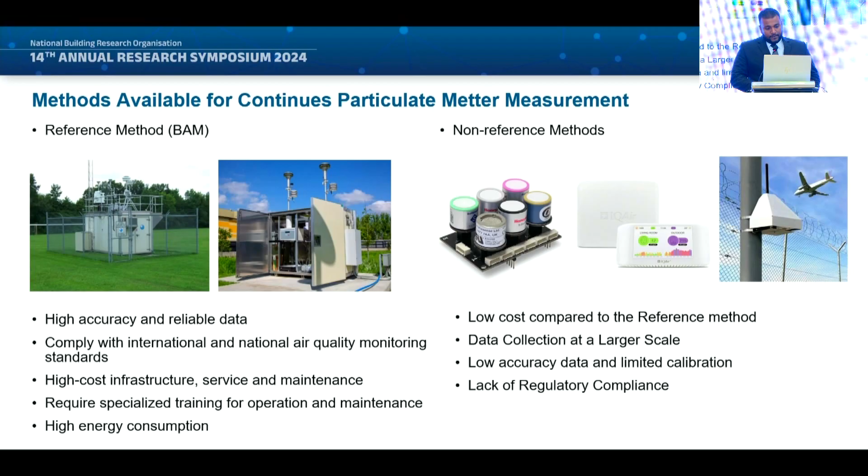Therefore, we have developed a low-cost sensor unit especially for particulate matter analysis, since it has several advantages compared to the other low-cost sensors in the market. They are low-cost, easy to calibrate to our environment conditions, easy to repair and troubleshoot, have no dependency on third-party service and maintenance, are easy to integrate with other custom-built systems or third-party platforms, etc.

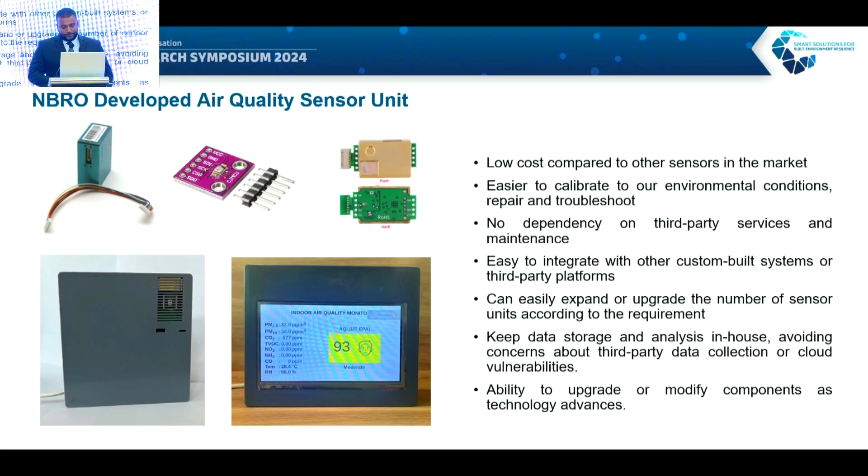Beta attenuation monitor, known as BAM, is one of the widely used reference-grade real-time techniques for ambient air quality monitoring in the worldwide. The principle behind beta attenuation monitor is that energy is absorbed from beta particles as they pass through particulate matter collected on filter media.

Beta ray can either be absorbed, reflected, or they can pass through a material. The concentration of material present determines how much beta ray intensity is attenuated.

Light scattering technique is used to calculate the particulate matter concentration in low-cost sensors. Light beam is scattered depending on the size of particles that go through the light beam.

The main objectives of this paper are to validate the sensor unit by correlating with the reference grade beta attenuation monitor, evaluation of performance of low-cost sensor in different environment conditions to check the data accuracy and reliability, and introduction of validated low-cost sensors to the existing air quality monitoring network to enhance the monitoring capacity.

Methodology. Co-location experiment was done in Colombo area for the validation of sensor unit. We take more than 1 month data for development of correlation between sensor unit and BAM.

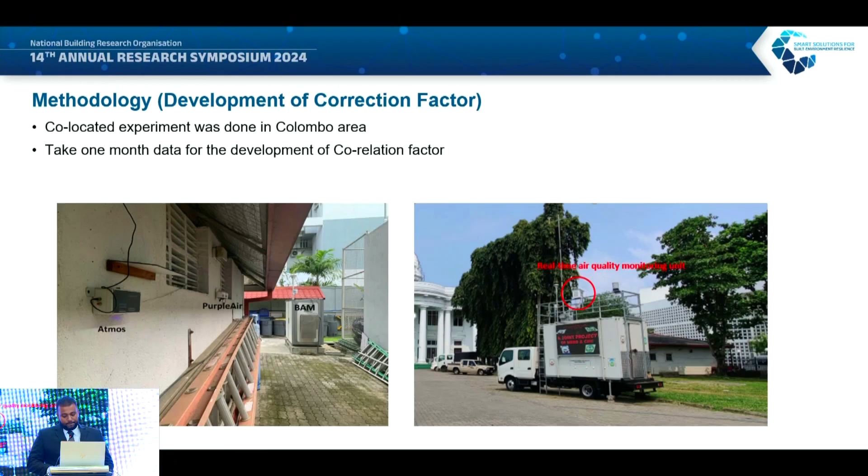In addition, a performance evaluation of multiple sensors was done in Battaramulla area, at the CEA reference grade laboratory at CEA Battaramulla area, and another study was done at Anuradhapura area for 1 week period. Also, performance evaluation in other areas are continuing with an island-wide monitoring program.

Validation was done according to the method given by US EPA, and the evaluation was done according to the NF ISO 13528 standard. Score Z and number EN values were used to confirm the performance of each sensor.

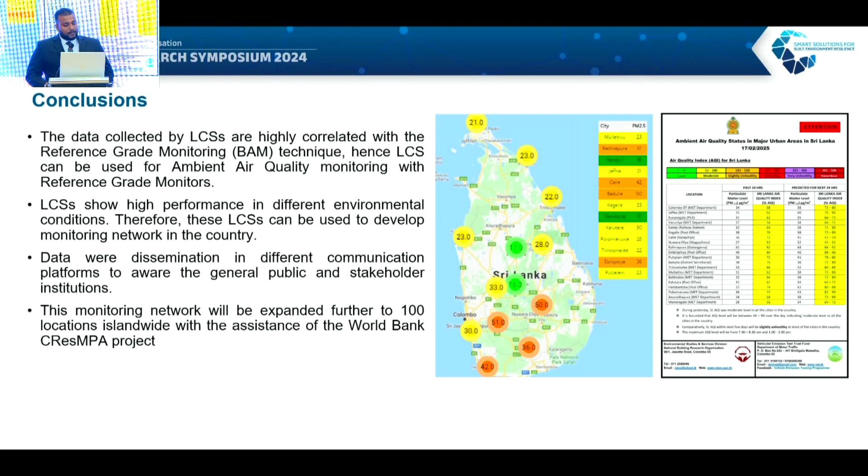And data were disseminated on different communication platforms to make aware the general public and stakeholder institutions. And this monitoring network will be expanded further up to 100 units island-wide with the assistance of World Bank funds. And these are some references used for this study. Thank you for listening.

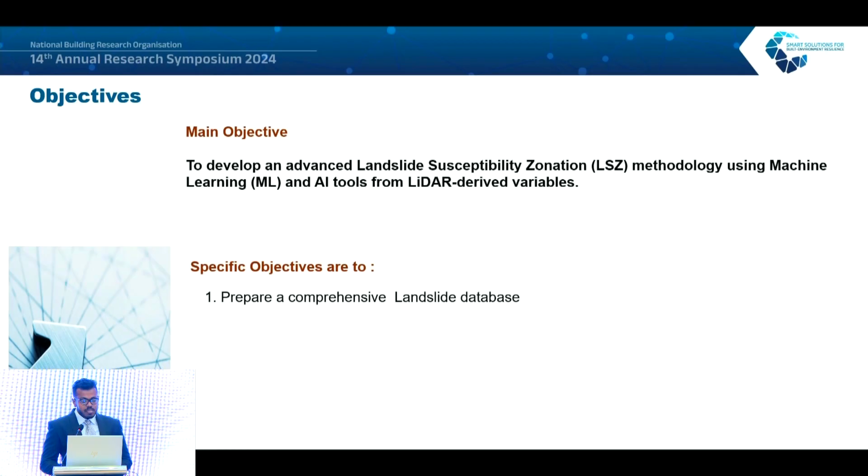So, our current methodology implemented by NBRO is laborious, expensive, and cannot be frequently updated. So, in this study, we present to target these above issues. So my main objective is to develop an advanced landslide susceptibility zonation methodology using machine learning and AI tools from LiDAR-derived variables. These are my specific objectives.

For the study area, we selected Kegalle district, which has more than 1 million people with population in hilly areas. Considering landslide history, this district is frequently affected by landslides, especially during the southwestern monsoon.

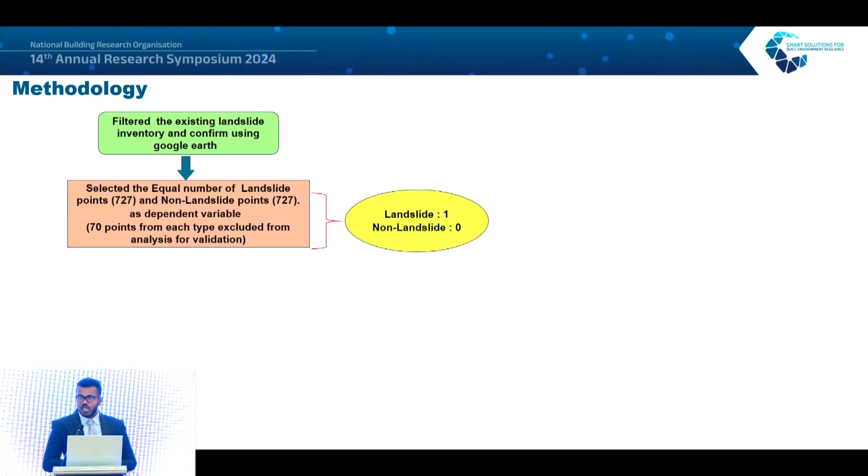For my methodology, we first filtered the existing landslide inventory and confirmed them using Google Earth. Then we selected an equal number of landslide points and non-landslide points as dependent variables, considering the landslide initiation area. Then 70 points from each type were excluded from analysis for validation.

Then we extracted 12 independent variables using LiDAR 2-meter DEM. Based on significance and literature, we selected 9 variables. After that, we applied 6 machine learning models and selected the best fit model. Then we generated a susceptibility score from the best fit model and finally reclassified it into susceptibility zones.

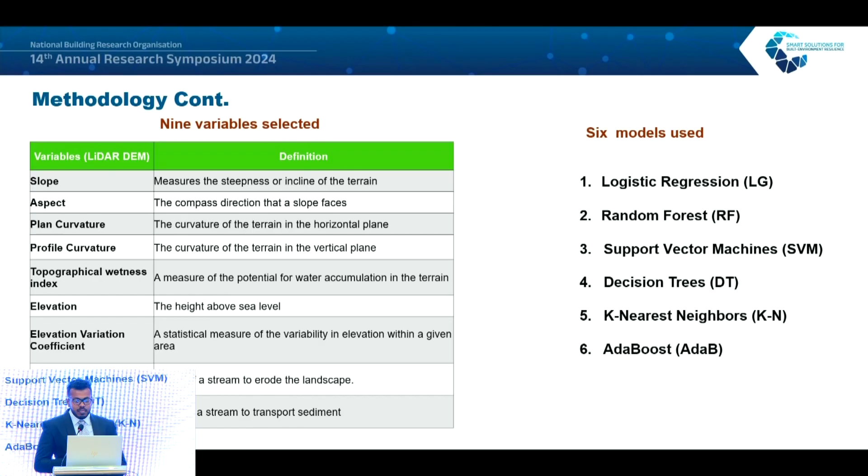These are the 9 variables I selected for this analysis, and these are the 6 models used here. For model discrimination, we use the area under the receiver operating characteristic curve and the precision-recall curve.

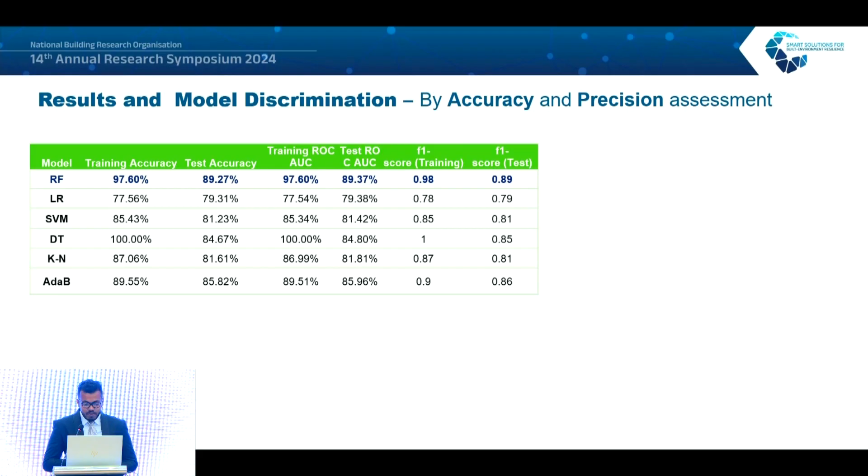So accuracy and precision assessment also confirm random forest is the best model. According to literature, random forest consistently outperforms other machine learning models in landslide susceptibility studies because it handles non-linear relationships, is robust to overfitting, has high accuracy in fast analysis, implicit feature importance, and handles high dimensionality. It also uses relatively few hyperparameters and is easy to tune.

Then for model validation, cross-validation was used. This is a technique to assess how well the model will generalize to new, unseen data. We used 5-fold cross-validation here, and the process is repeated 5 times, with each fold serving as the test set once, to get a more robust estimate of performance than a single train and test split.

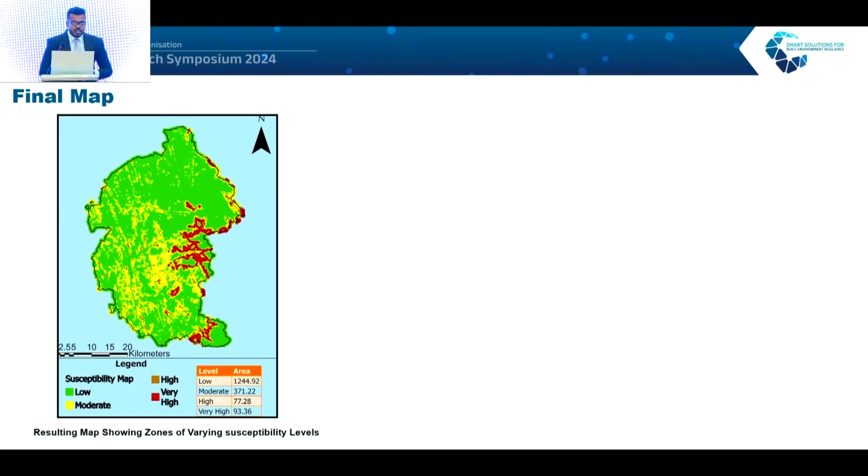Using this validated model, we generated the map for the entire Kegalle district.

For that, we reclassified into 4 susceptibility zones, and this reclassification was done considering the cumulative area of the high susceptibility zone to be less than 10%. This table shows the cumulative area of these 4 zones.

For validation, 74% of landslide points were located within high and very high susceptibility zones, and 71% of non-landslide points were located within low susceptibility zones.

In conclusion, LiDAR-derived variables and machine learning can be effectively used in this type of study. In this study, the random forest model showed the most promising result among the 6 models tested, achieving the highest accuracy and excellent discrimination. Model validation also confirms this.

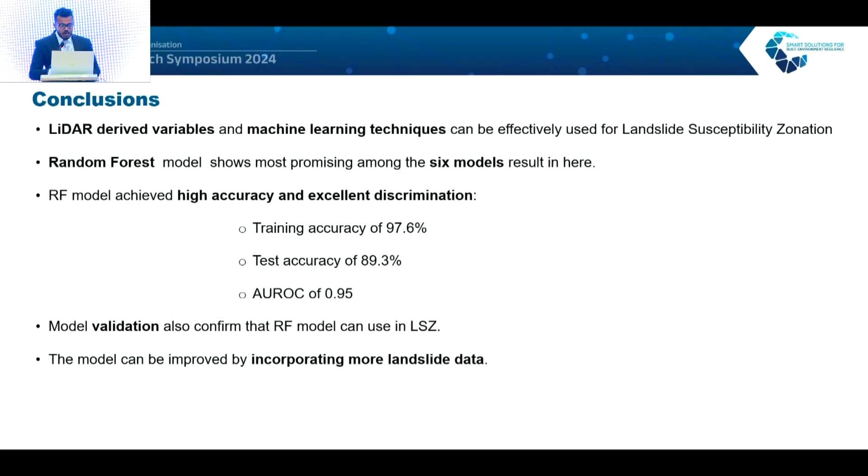But improving with more landslide data and considering other relevant data such as geology, hydrology, land use, and landform can improve this model further. Also, it is advisable to consider specific terrain and environmental conditions when extending to different regions.

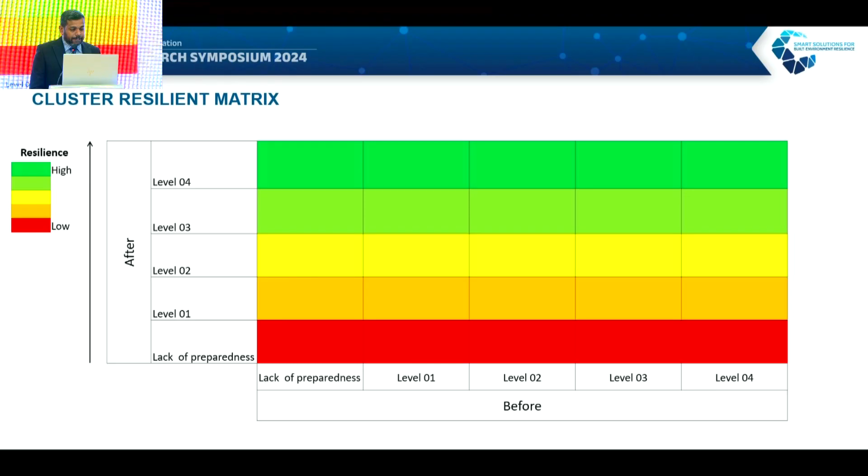So with this matrix, we have collected the information from 119 clusters to assess their resilience level based on 17 identified resilience indicators. A comprehensive and temporal analysis method was used, and we analyzed the cluster resilience level before and after implementing the community-based programs.

Our finding is that some of the clusters exhibit a high baseline resilience level requiring only monitoring programs, and most of the clusters initially lacked baseline resilience. However, their resilience levels improved following the implementation of our community-based approach programs. When we take this into the matrix,

68 clusters achieved level 1 resilience from the bottom, and 39 achieved level 2 from the red line. Another 11 clusters were in level 1 before, and out of them 2 remained in the same level, 5 achieved level 2 and 4 achieved level 3. And 3 clusters were in level 3 and remained in level 3 after the implementation of the community-based program. However, they need more attempts to achieve the high resilience level, the level 4 green line.

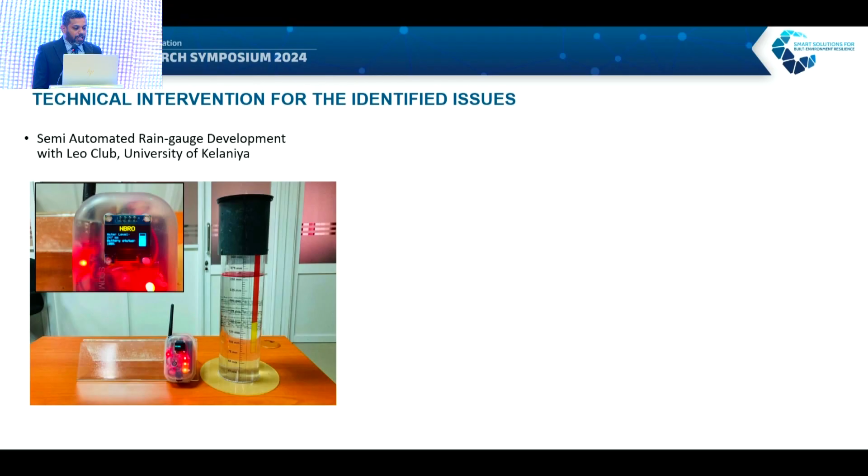The difficulty in measuring rainfall data using a manual rain gauge is one of the main issues identified. Therefore, we have technically intervened and introduced a semi-automated rain gauge in collaboration with the Leo Club of University of Kelaniya to tackle this issue. This semi-automated rain gauge consists of 3 parts: the manual rain gauge, the measuring sensor, and the remote display. The remote display can fit in the living area of the house.

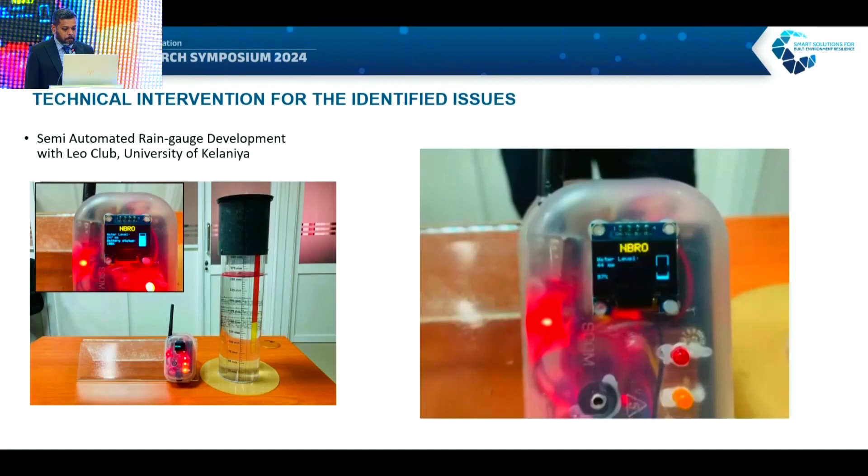During rainy times, the rainfall levels will display on the remote display. When it reaches the 75 millimeter level, the yellow LED will illuminate, at 100 millimeters the amber LED will illuminate, and the red LED will indicate the rainfall has reached 150 millimeters, which means evacuation level. After 250 millimeters, you will hear continuous beeping. This is still under development, and with more calibration and development, we intend to introduce this into the community for self-decision making and to improve their resilience.

So finally, with these findings, this assessment was a basic level assessment with hierarchical levels, and it should incorporate a comprehensive resilience assessment framework, such as a cluster resilience index, to systematically evaluate governance, technical, social and environmental factors, and also scale up the use of digital tools such as rain gauges connected to online dashboards, WhatsApp groups, and mobile apps for real-time data sharing and early warning dissemination.

And appreciation and recognition of the community contributions for their active participation, and also establish a robust monitoring system to track the progress of resilience building activities such as committee meetings, pre-monsoon preparedness, and mitigation measures.

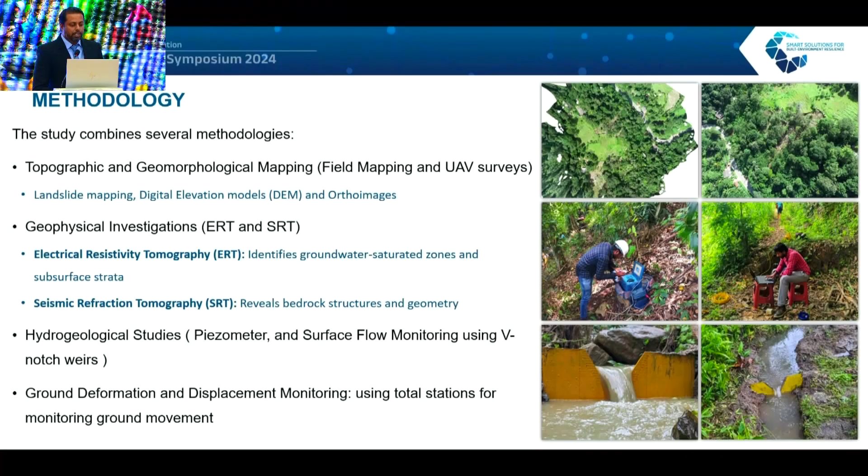This study combines several methodologies: topographical and geomorphological mapping, including field mapping and UAV surveys, landslide mapping, and creating the digital elevation model and ortho images. We have done geophysical investigation, like electrical resistivity tomography, which identified the groundwater saturated zones and subsurface strata, and seismic refraction tomography to identify the bedrock structures and geometry. Hydrogeological studies included installation of piezometers and surface flow monitoring using V-notch weirs. We also did ground deformation and displacement monitoring using a total station.

Generally, electrical resistivity tomography shows the ground electrical resistivity variation. In the low resistivity zone, we can find groundwater, seawater intrusion, groundwater saturated zones or highly conductive materials. In the high resistivity zone, bedrock or low conductive materials can be found. In between, soil or moderately conductive materials can be found. Seismic refraction tomography generally shows the seismic P-wave velocity variation. The low velocity zone shows loose or not compacted materials. In the high velocity zone, we find hard rock or hard materials. In between, medium to high density soil can be found.

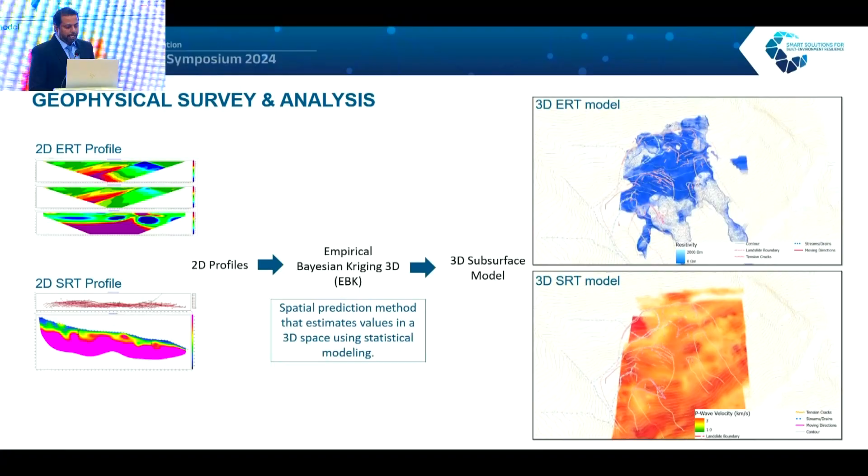First, the field data is used to create 2D profiles through analysis. After that, the 2D ERT profiles were made into the 3D model using the empirical Bayesian kriging 3D method. Empirical Bayesian kriging is a spatial prediction method that estimates values in 3D space using statistical modeling. These are the results from the 3D ERT and SRT models. Let's understand them separately.

From the 3D ERT model, as you can see in the map, the blue color shows the low resistivity zones where we found high groundwater concentration. The blue area is also within the landslide body area; the concentration is within the landslide body. This is a good finding that groundwater is a key factor in the landslide instability.

Let's move on to the seismic results. In the P-wave analysis, red color shows high P-wave velocities, indicating denser material such as bedrock, and the low P-wave velocity, green to yellow color, represents less dense materials such as soil.

So let's integrate the ERT and SRT results. As you can see in the image, first is the ERT, then SRT, and the combination of the integration. And you can see the blue color region is concentrated within the landslide mass and the movement direction, like a valley-like geometry.

And even during the dry period, there were many springs and water coming from the landslide, and also there were movements observed despite minimal or no rainfall in May 2024. These findings suggest that internal groundwater dynamics can also drive the activation of the landslide. All things emphasize that there is a need for effective groundwater management strategies for mitigation.

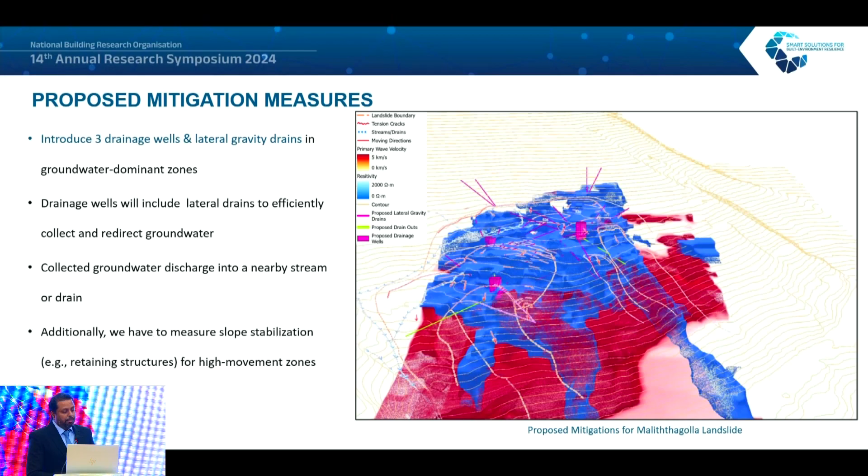So, we propose mitigation measures. Introducing three drainage wells is our proposal. As you can see in the image, drainage wells including lateral drains, in pink color in the 3D model. Using the lateral gravity drains, we collect water from the landslide area to the drainage well and redirect the groundwater discharge to the nearby stream or drain. Additionally, we have to take other slope stability measures like retaining structures for high movement zones.

So, as a conclusion of this study, integration of SRT and ERT data enhances the bedrock geometry, structural features, and groundwater behaviors. Groundwater dynamics play a critical role in the landslide and its activation. Effective mitigation requires subsurface drainage to control groundwater pressure and improve soil stability. The developed framework provides effective landslide mitigation in similar vulnerable areas. Additionally, these 3D geophysical approaches can be applied to various geotechnical, geological and hydrogeological applications.

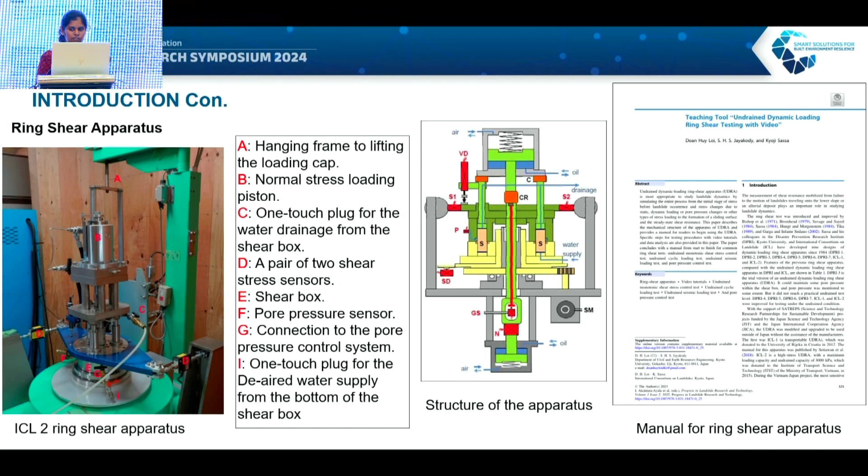Here you can see the ring shear apparatus. This apparatus is specialized laboratory equipment to determine the residual shear strength of soils. This simulates large shear deformation under controlled conditions. This picture shows the ICL2 ring shear apparatus in the NBRO Geotechnical Engineering Laboratory. Anyone can download the operation manual. It's freely available on Google.

Now let's see the aims and objectives of this research. The aim of this research is to evaluate the residual shear strength properties of soils in landslide prone areas in Sri Lanka using ring shear tests and to investigate the influence of soil composition on shear behavior. There are two objectives. First one is to determine the residual shear strength parameters of soils from selected landslide locations using undrained ring shear tests for LS Rapid simulation. Second one is to investigate the relationship between soil composition and shear behavior, including mobilized friction angles and steady state shear resistance.

Now let's see the research methodology. First, 4 landslide locations were selected along the Passara Bibile road area in Sri Lanka for the study. Then soil samples were collected from identified landslide locations. Then index property tests were conducted on the collected soil samples. After that, mobilized friction angle, steady state shear resistance and shear displacement characteristics were analyzed. Finally, effective stress paths and brittleness indices were determined and compared.

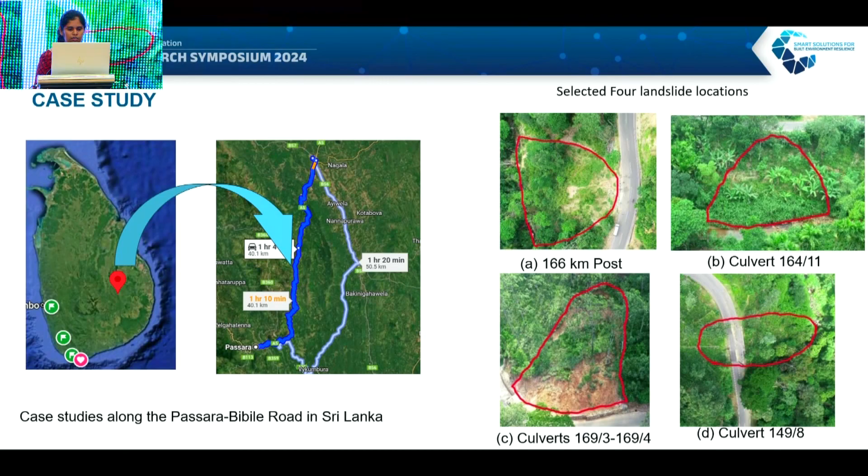Here you can see the focused area. This research was conducted focusing especially on case studies along the Passara Bibile road in Sri Lanka. This region experienced significant landslides during heavy rainfall events in December 2023, activating 4 notable landslides. These are the photographs of the selected 4 landslide locations.

Now let's see the laboratory testing part. The residual shear strength behavior of landslide soils was investigated through undrained ring shear tests conducted on the soil samples obtained from landslide locations. First I did the index property tests, sieve analysis and Atterberg limit test. Then I did the ring shear test. For that I used the ICL2 undrained ring shear apparatus with a maximum loading capacity of 3000 kilopascal.

For testing, dry soils passing through 2 millimeters were used. Saturation was achieved using deaired water in a vacuum tank. Then the BD value is checked to measure the degree of saturation. The most difficult part of this saturation procedure is that high fine content soils take more time to saturate.

Then soil samples were consolidated to simulate the initial stress condition of the sample. Then I did the monotonic shear stress control test under saturated condition. For that I used a shear stress increment rate of 0.25 kilopascal per second and an effective normal stress of 100 kilopascal.

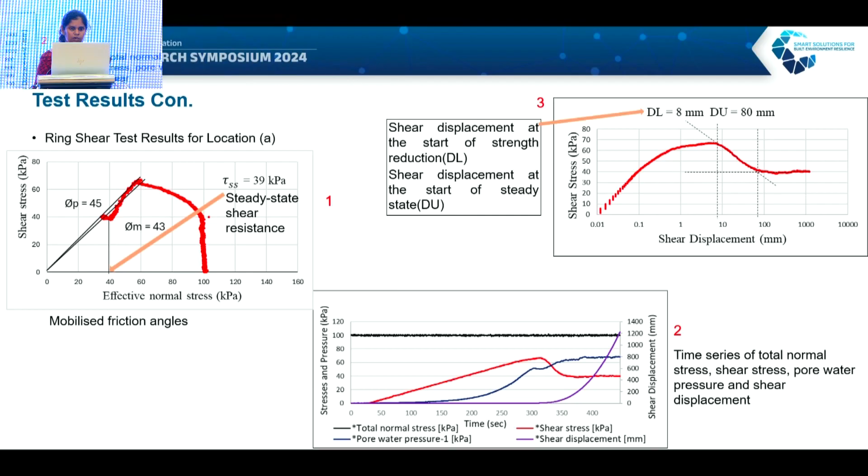The third graph is a shear stress versus shear displacement graph. From that graph we can obtain the shear displacement at the start of strength reduction and the shear displacement at the start of steady state.

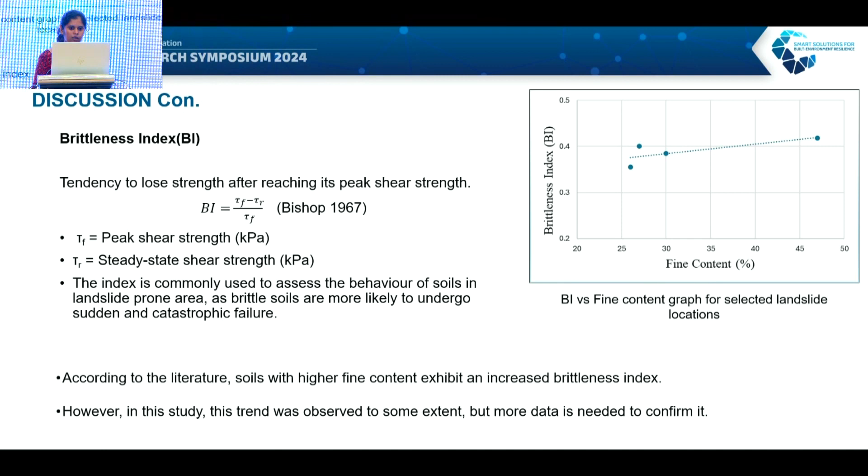According to the literature, soils with higher fine content exhibit an increased brittleness index. However, in this study, this trend was observed to some extent, but more data is needed to confirm it. Now let's see the conclusion part.

After doing ring shear tests for all landslide locations, the following conclusions were obtained. As fine content increases, the mobilized friction angle during motion decreases, and also shear strength decreases with higher fine content, while soils with lower fines exhibit higher peak strengths, and also an increase of brittleness index with fine content was observed to some extent.

The ultimate goal of this research is to compare residual shear strength parameters with a broad range of soil samples from diverse landslide locations to prepare a database for LS-RAPID simulation, and I also hope to perform LS-RAPID analysis for the 4 study locations using the obtained residual shear strength parameters to predict the runout path.

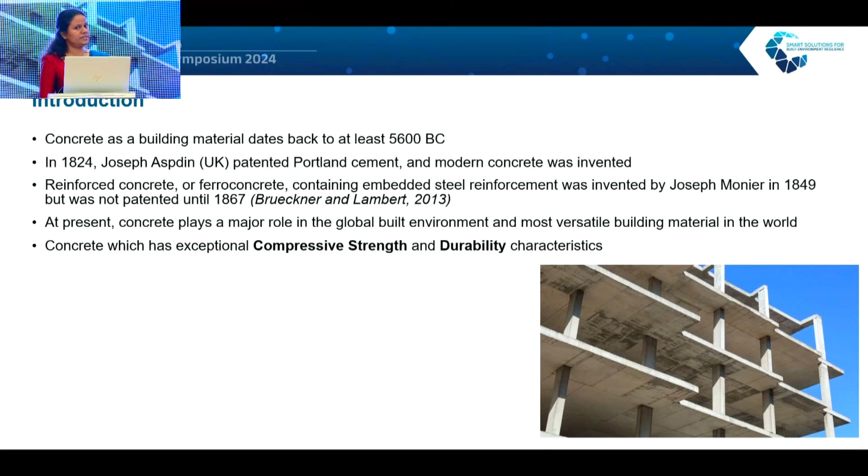Good afternoon, everyone. The topic of my research is enhancing the reliability of half-cell corrosion detection in aging concrete structures. Contents of my presentation. First, we move on to the introduction. The history of concrete as a building material dates back to at least 5600 BC. Modern reinforced concrete was invented in 1849.

At present, concrete plays a major role in the global built environment, and it is the most versatile building material in the world. The demand for concrete is rising rapidly due to its exceptional compressive strength and durability characteristics. Do all RC structures withstand their expected service life? No. Due to several reasons, concrete undergoes different degradations.

The most common concrete degradation mechanism is embedded rebar corrosion. Corrosion repairs in RC structures incur substantial financial burdens to the country, and diminish the service life of structures. Research background. Signs of corrosion, rust stain lines, cover cracking, or concrete spalling become visible when it reaches advanced stages. Therefore, early detection of corrosion is vital.

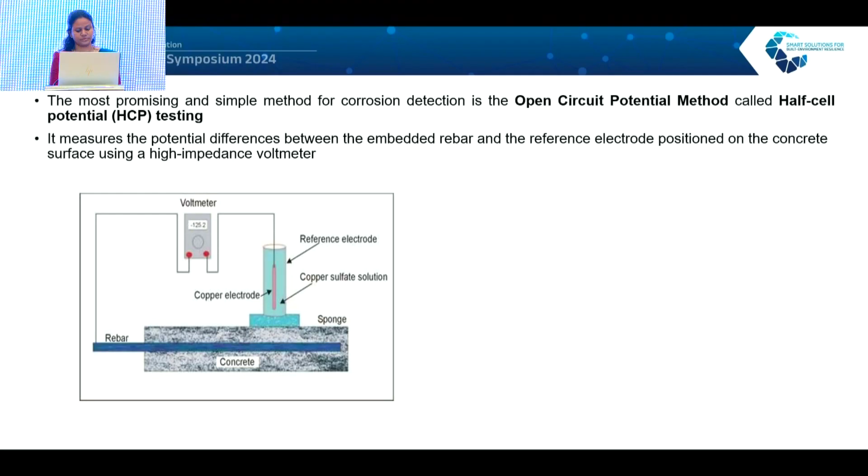Many advanced techniques are introduced to detect the onset of corrosion, namely sensor systems, but sensor installation for existing structures is really challenging. The most promising and simple method for corrosion detection is the open circuit potential method called half-cell potential testing. It measures the potential difference between the embedded rebar and the reference electrode positioned on the concrete using a high impedance voltmeter. Here I show you how we conduct this testing, ensuring electrical continuity with the embedded rebar in concrete. There are many influencing factors for half-cell potential testing.

There is interpretation guidance given in the ASTM standard, but when potential values are between minus 200 millivolts and minus 350 millivolts, it is interpreted as an uncertain corrosion condition, and monitoring an individual test parameter is inadequate for reliable corrosion diagnosis. Subsequent to corrosion initiation, most chemical and physical parameters of the concrete and the steel-concrete interface are changing. When we examine those parameters, we can enhance the reliability of corrosion detection techniques.

The objective was to enhance the reliability of the electrochemical corrosion detection technique, half-cell potential testing, by analyzing corrosion-related building investigation data from inland and coastal regions. This study consisted of field data of real RC structures, apart from laboratory control conditions.

When we move on to the methodology, first we conduct a visual survey and select 35 typical RC columns located in school buildings at different exposure settings. Then rebar arrangements and cover readings were taken using a cover meter, and moisture status was measured using an aquameter.

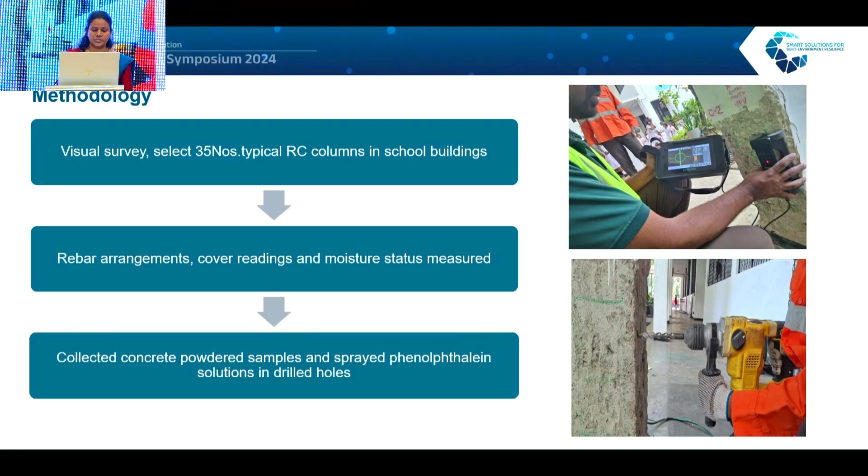Then concrete powder was collected by drilling to determine chloride concentration, and phenolphthalein was sprayed as a pH indicator to determine carbonation depth. Then we conducted half-cell potential testing and surface resistivity testing.

After that, corrosion-related parameter results with HCP readings were examined and exposed the related rebar points. Then we tabulated our test results and categorized them as per the ASTM C876 standard. Finally, we recommend required test parameters that need to be conducted simultaneous to the HCP testing.

The obtained half-cell readings were categorized into three main categories as per the ASTM C876 standard. When considering the level of chloride concentration near category 3, we subdivide it into another two. So firstly, we consider category 1.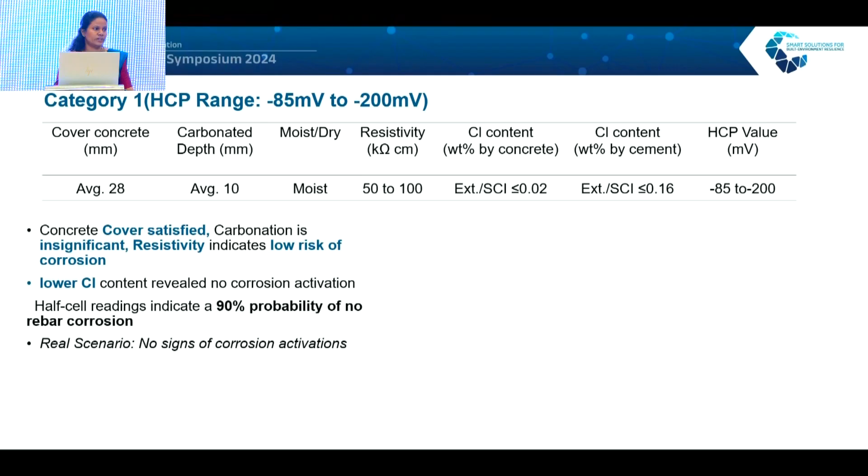Then we expose the rebar point. The real scenario showed no signs of corrosion initiation. So our corrosion-related test parameters, half-cell testing, and the actual conditions were compatible.

Then we move on to category 2. Here cover is insufficient and carbonation is not significant. Resistivity indicates high risk of corrosion, with high chloride concentration.

When we move on to category 3, in category 3A, average cover was 22 millimeters, which is not satisfied, and carbonation is more than the cover concrete, resistivity is negligible, and chloride concentration is lower. This heavy carbonation indicates susceptibility of rebar corrosion.

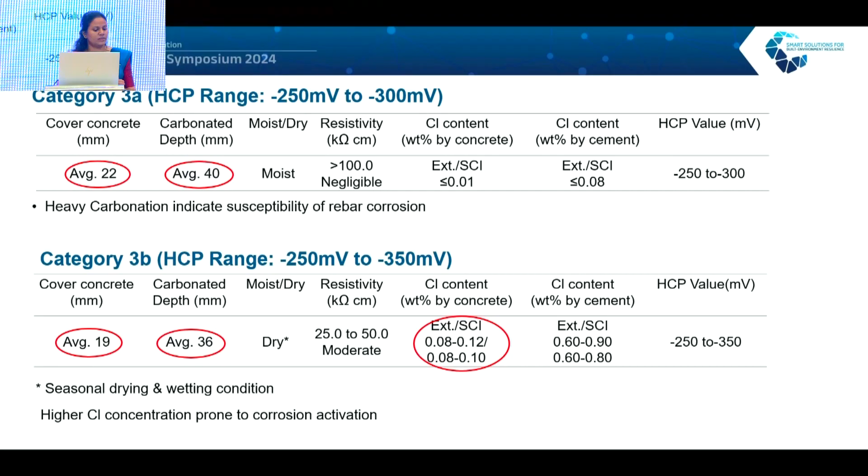Then we move on to category 3B, same scenario, cover insufficient, and also carbonation is beyond the embedded rebar, and chloride concentration is higher. That higher chloride concentration is prone to corrosion activation.

In both scenarios, we identified that carbonation is beyond the embedded rebar, which means alkalinity of the concrete reduced to pH 9 or below.

Electrical conduction through concrete needs a continuous pore network. Formation of calcium carbonate through carbonation causes a pore-clogging effect, inducing resistive media. This obstructs the electrical continuity through concrete and reduces the reliability of half-cell potential results.

HCP testing is not sufficient for accurate interpretation of corrosion kinetics in all scenarios, majorly for carbonated concrete. Related technical reports emphasize that the HCP method needs to be interpreted in the context of additional information. So in this case study, we used our building investigation data and

validated this concept, to diagnose corrosion activity in 3A and 3B types of carbonated concrete. It is essential to conduct chemical parameter testing, namely chloride levels, carbonation, and cover measurements, consequent to the HCP testing.

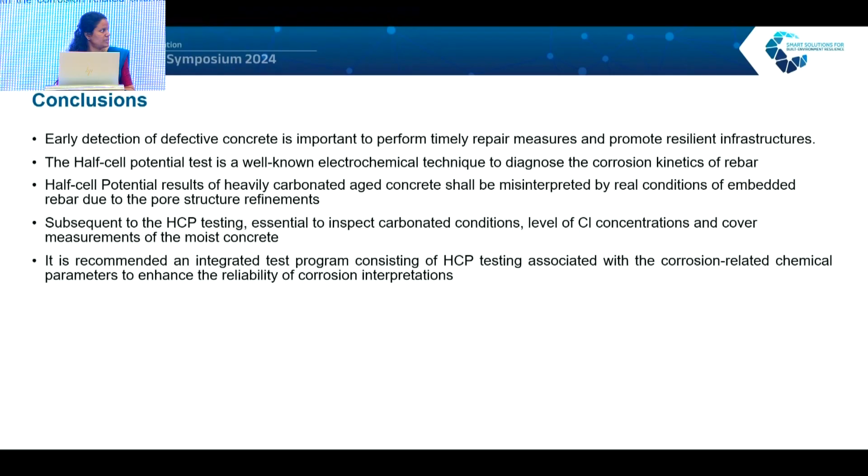It is recommended to have an integrated test program consisting of HCP testing associated with corrosion-related chemical parameters, to enhance the reliability of corrosion interpretations.

As a way forward, there is a need to conduct comprehensive study on physical, chemical, and mechanical parameters of concrete and rebar of aged corroded RC concrete, to develop the corrosion detection technique.

And also, now we are introducing various kinds of cement supplementary materials. It is needed to determine related critical chloride content, chloride ingress rate, and carbonation of different binder types other than conventional ones.

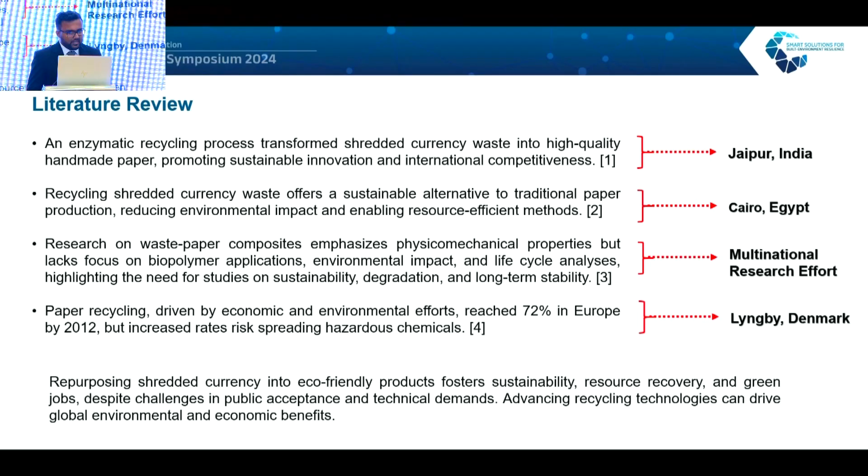Under the literature review, there are some countries that made value-added products using currency waste. India and Egypt made handmade papers using currency waste, and some multinational researchers made pulp using currency notes. Denmark researchers found some hazardous chemicals incorporated with these currency notes.

According to the literature, the main component of waste currency is cellulosic fiber. Other than that, polypropylene, lignin, hemicellulose, and some metal ions, some of them heavy metals, can be incorporated with these waste currency notes. Because of the cellulosic fiber, we can use them for making plywood boards, soft boards, handmade papers, and decorative items.

Our main objective is developing a value-added product using shredded currency waste in Sri Lanka. Under the task breakdown, we need to find the suitability of currency waste for building applications, determine the product properties and compare them with existing market products, study the properties to meet international standards, and convert the currency waste into an eco-friendly product.

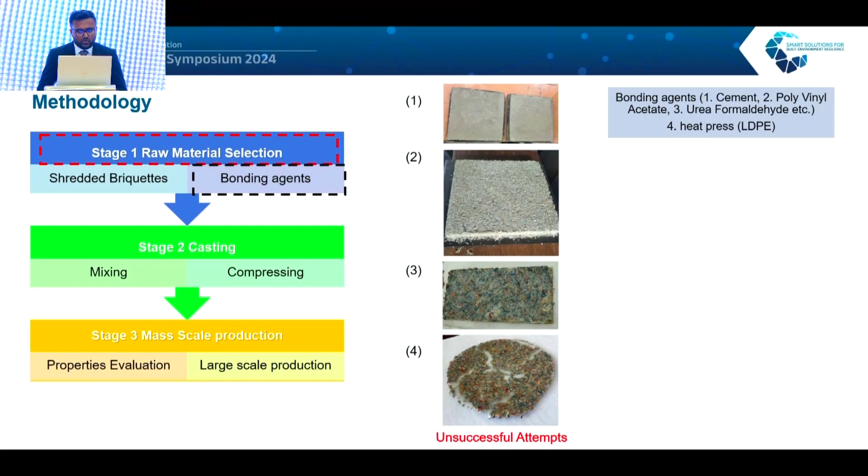Let's move on to the methodology. Under stage 1, we need to select the raw materials. The main raw material is shredded currency briquettes, and the other is a bonding agent. We tried many binding agents, such as cement, polyvinyl acetate, urea formaldehyde, and LDPE, but because of drawbacks such as bad odor during production and uneven distribution of particles, we are now using resin and hardener to make our product.

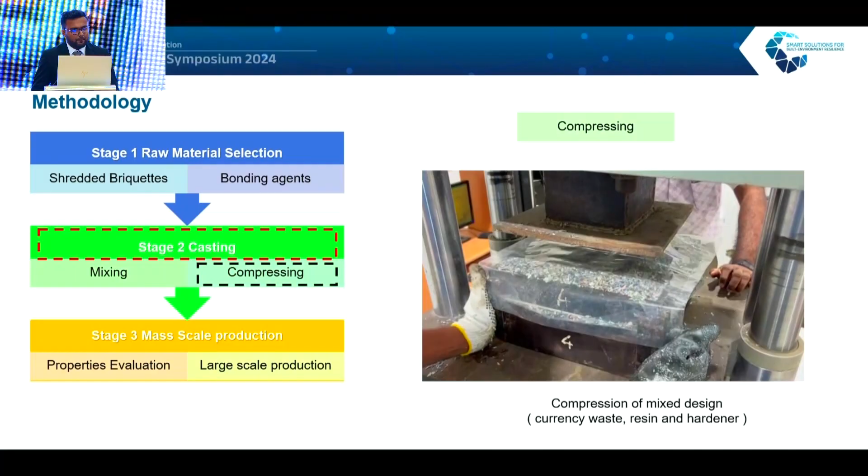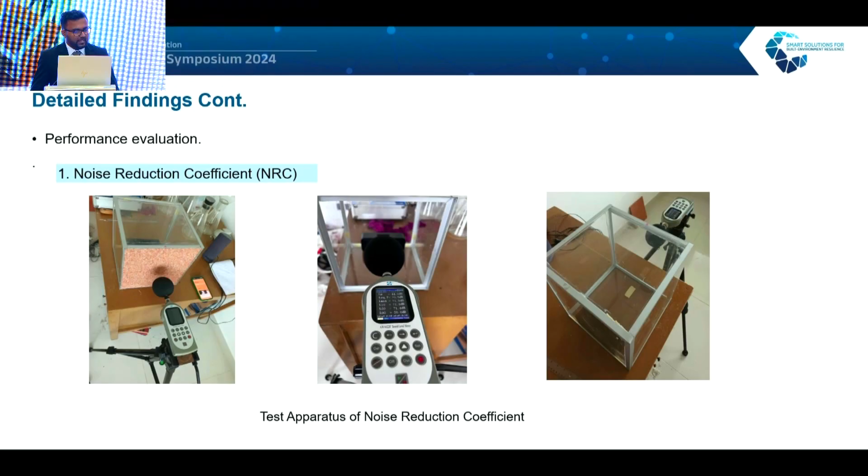Under the detailed findings, we evaluated properties such as noise reduction coefficient, thermal conductivity, density, and modulus of rupture according to standard test methods. The first is noise reduction coefficient. In Sri Lanka, there's no proper method to determine this, so we fabricated an apparatus using acrylic sheets, giving different frequencies using a frequency generator and Bluetooth speaker, then measuring the noise level using a noise meter. According to test results, mixed proportion 1 shows the highest noise reduction coefficient value, indicating excellent sound absorption.

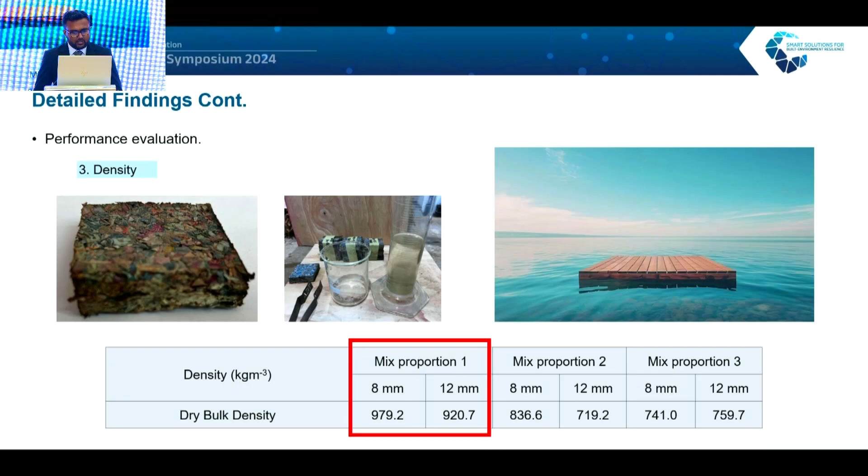The third property is density. We measure the dry bulk density, which is around 900 kilograms per cubic meter, so it floats on water. The fourth is modulus of rupture. We fabricated the test mold according to the standard test method and measured the deformation using dial gauges. According to test results, mixed proportion 1 shows the highest modulus of rupture value, around 16 megapascal.

Under the test results summary, all test results are satisfied according to the test standards. In the near future, we are planning to evaluate the properties further, such as fire resistivity, moisture absorption and durability, and we are hoping to compare the properties with existing market products. We also need to design the large-scale production procedures. When we consider the material cost, it's around 2,900.

Under the conclusion, because of the high noise reduction coefficient value, it indicates an excellent sound absorber, so we can use them for acoustic applications and also ceiling and partitions. Because of the low thermal conductivity value, it falls within the thermal insulator category, so we can use them for heat insulation in buildings. According to the density results, it falls within the high density particle board category, so it ensures good mechanical strength and durability. And according to the modulus of rupture data, it also falls within the high density particle board category, so it has high load bearing capacity, and we can also use them as decorative items.

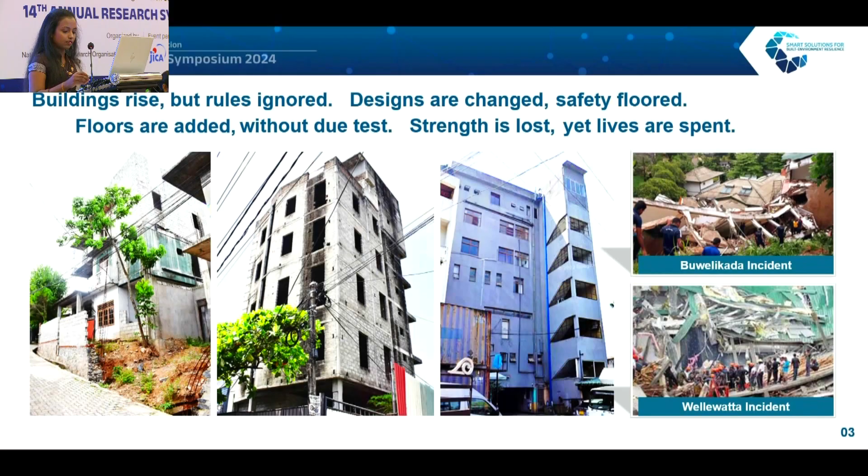Such faulty construction in the country is mainly because we do not have a legal mandate to govern the construction industry. The Buwelikada building collapse and Wellewatta building collapse are two prime incidents which clearly showcased how non-adherence to building design codes and standards leads to building failures. On the other hand, although the country is blessed with its natural geographical location, it's vulnerable to natural hazards. Floods and landslides are more common with relatively low impact, while cyclones and earthquakes are very rare but their impact severity is very high.

These kinds of natural disasters can bring down these defective structures very easily. So before history repeats, the government of Sri Lanka has initiated an effort to develop a national building code for Sri Lanka, mandating the National Building Research Organization, Urban Development Authority and Construction Industry Development Authority to ensure that resilience is embedded in this new building code. By the time this National Building Code is implemented, let's say 2 to 3 years from now,

the existing building stock in the country will probably represent a mix of both code-compliant and non-code-compliant buildings. So this new building code is not only responsible for governing new construction, it also has a responsibility towards the existing built environment. We have proposed a separate dedicated chapter called Existing Structures into this new building code to act as the legal mandate for the existing built environment. Most importantly, this chapter should be well equipped with appropriate retrofitting measures to safeguard the resilience of the built environment. So in this research study, we have selected one such retrofitting technique called concrete jacketing.

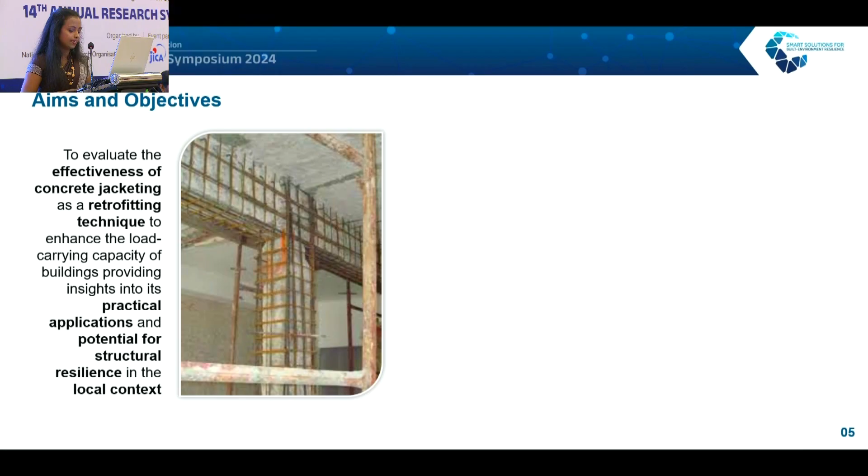In order to achieve this aim, we have set 3 objectives. The first one, to assess the performance of concrete jacketing by comparing the pre and post retrofitting performance. The second one, to propose practical recommendations to include this as a standardized retrofitting method in the Sri Lankan Building Code. And third one, to highlight considerations like structural efficiency, cost effectiveness, and ease of implementation in a local context.

Moving into the methodology, it's a 5-step approach. Let's go one by one. The first step is the structural analysis and design check for an existing building. This is the building we selected. Upon the request from the building owner, we went on a site visit. At that time, the building was not occupied. We were provided with the original design drawings, something that rarely happens when we do structural investigations for existing buildings, but we wanted to confirm whether these details are there in the actual building.

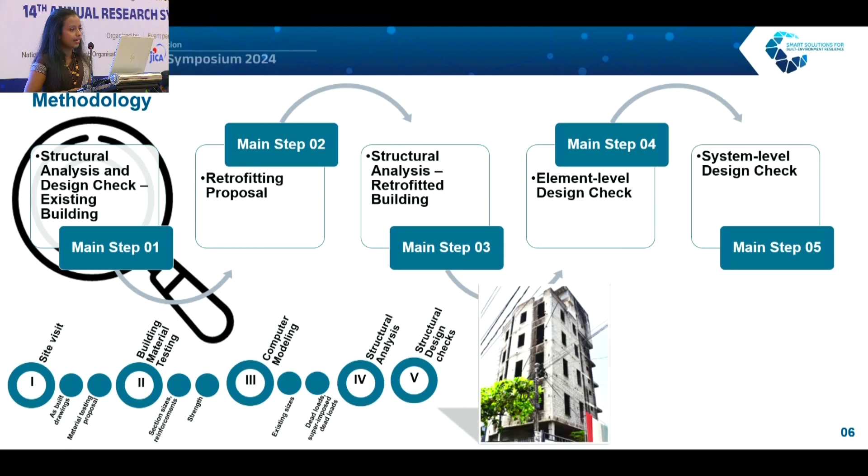So we conducted building material testing to identify the actual section sizes, reinforcements, and strength parameters. By utilizing these results, the existing sizes and the existing loadings, we conducted computer modeling, structural analysis, and structural design checks per the Euro norms. This is a snapshot of the building we created. It's a 7-storied building with a basement, with a nearly rectangular plan view, resting on a raft foundation. You can see an elevation view of the building also.

These structural design checks were conducted for each and every element of this building. But due to time constraints, I will only be showing you the results for the critically loaded column and the critically loaded beam. Here you can see the comparison of the demand on this critically loaded column against its capacity. The green color code represents the demand and the blue color code represents the capacity. As you can see here, the demand is always lesser than the capacity, but at certain instances these demands are about to exceed the capacity. This comparison is only valid when these member forces act on this column separately, but when these act all together, these capacities will be reduced.

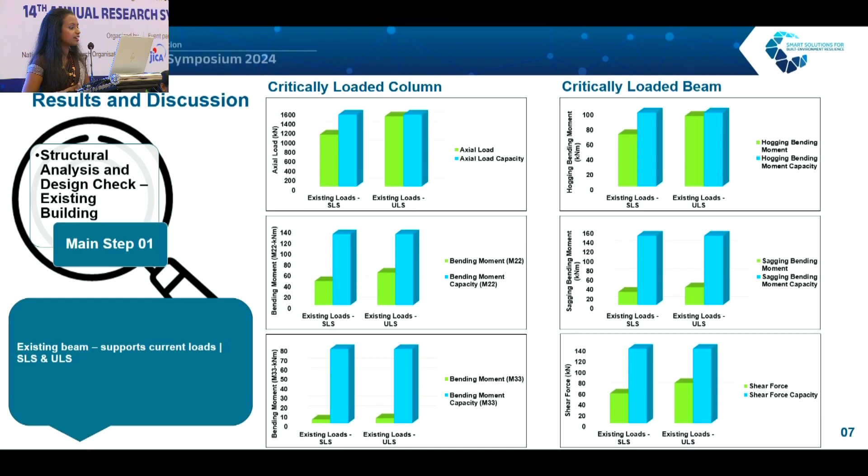So according to our findings, this critical column cannot carry the existing loads at both serviceability limit state and ultimate limit state. This clearly showcases a discrepancy between the design theory and the actual conditions. Thanks to the design safety factors and the higher design loads we consider in the design stage, this building is there without causing any kind of disaster. Similarly, for the critically loaded beam, you can see the demands are lesser than the capacities, but at certain instances, these demands are about to exceed the capacities. Anyway, this existing beam can support the current loads at both serviceability limit state and ultimate limit state.

Then moving into the second main step, the retrofitting proposal. It is important to note that this building is not occupied at the moment. Once it is occupied, it will incur more and more loads. You can see the percentage increment of loads on this critically loaded column. And here we have done a comparison between the new demand against the existing capacities. You can clearly see that the demands are exceeding the capacities. So we need retrofitting. This is the section and the reinforcement details we propose for the column retrofitting.

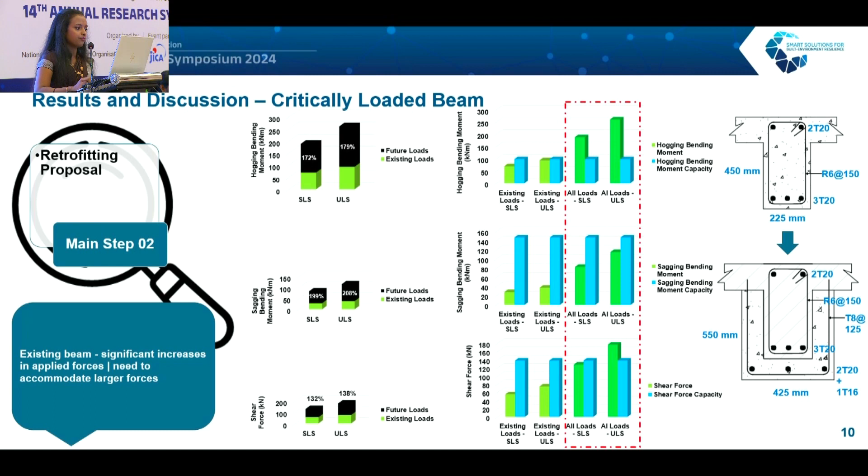Then moving into the critically loaded beam, you can see the percentage increments in the loads, and we have compared the new demand against the existing capacity. The demands are going beyond the capacity. So this beam also requires retrofitting, and this is the section and the reinforcement details we propose for the beam retrofitting. Then moving into the third step, that is the structural analysis of the retrofitted building. By utilizing the assumed section sizes and reinforcement arrangements, we again conducted computer modeling, structural analysis, and design checks per the Euro norms for our new building.

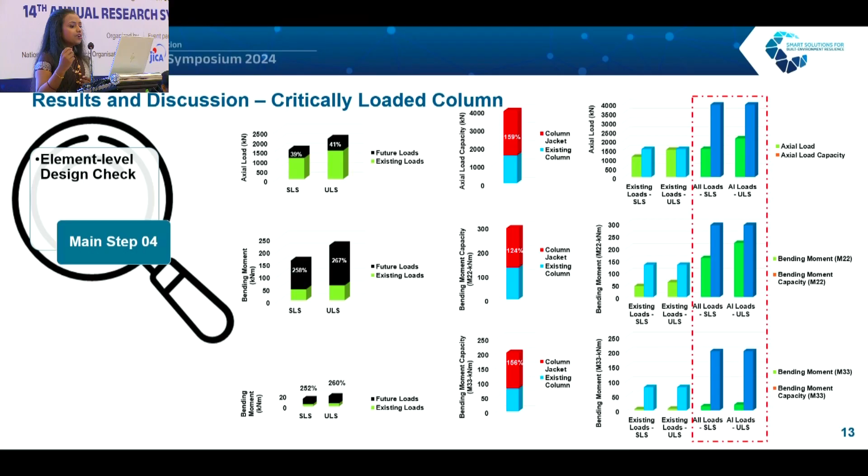And in this comparison, you can see the demands are higher than the capacities when it comes to the hogging bending moment. And for the cases of sagging bending moment and the shear force, the demands are lesser than the capacities. So structural concrete jacketing is identified as a viable method to improve the sagging bending moment capacity as well as the shear force capacity of the beam, but not the hogging bending moment capacity of the beam.

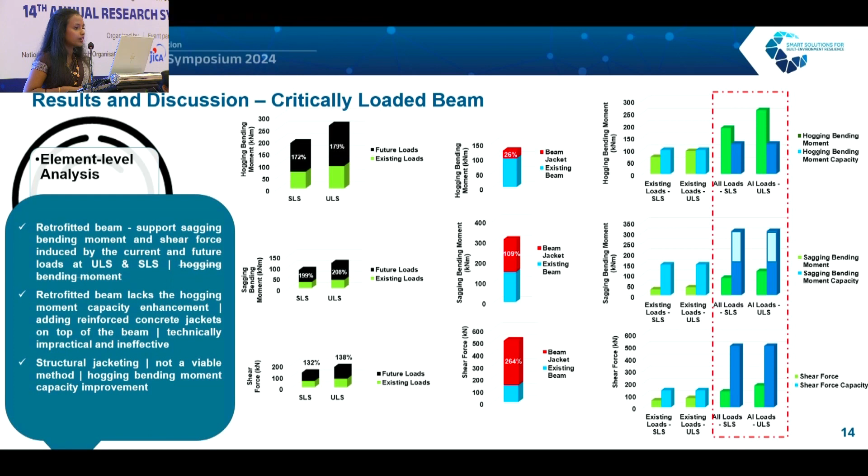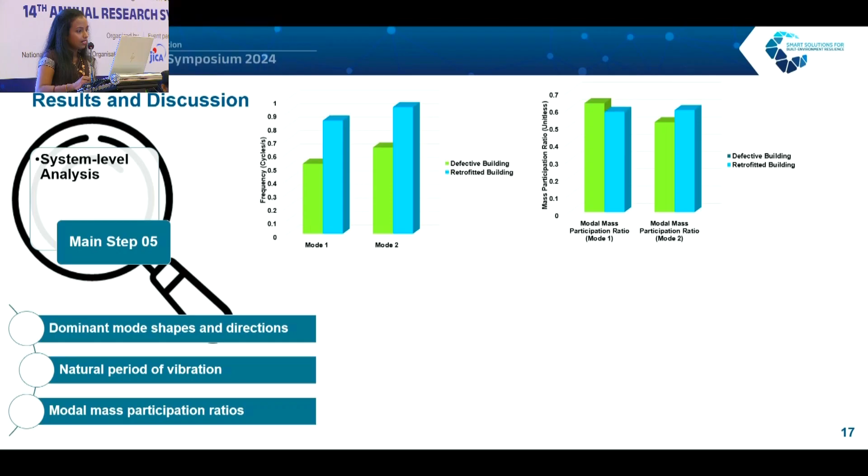Then moving into the last step, the system level design check. A modal analysis was conducted here. The green color code represents the defective building and the blue color code represents the retrofitted building. We could see a change in the dominant mode direction, probably due to the change in the distribution of mass and stiffness with retrofitting. And also there is an increase in the natural frequencies, and it indicates that the stiffness and the overall robustness of the building has been increased, thus indicating that the building's ability to resist deformation is also increased.

And also we can see an improvement in the fundamental mode's mass participation ratio in only one direction but not in the other direction. This emphasizes that retrofitting has altered the structure's dynamic response, leading to higher complex modes with larger internal forces and complex deflections.

Finally, to conclude, this study investigated the effectiveness of concrete jacketing to strengthen defective buildings. The element level capacity analysis clearly showcased that this defective building can support the current loads to a certain extent, but it cannot carry the anticipated future loads. The retrofitted building can support the loads at both serviceability and ultimate limit state, except for the hogging bending moment capacity of the critical loaded beam we considered in this study.

This retrofitting proposal should be further optimized to minimize the overstrength, material wastage, and construction cost. The global structural analysis of these buildings suggested that we need to refine this retrofitting proposal to avoid complex displacements of the building. And before we integrate this as a retrofitting method in the Sri Lankan building code, further research needs to be conducted. As future work, full-scale testing and case studies need to be conducted.

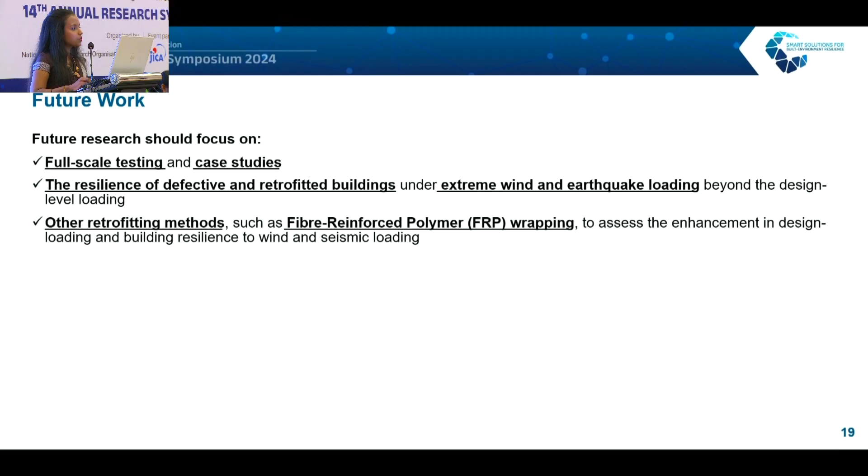And also the resilience of defective and retrofitted buildings should be evaluated for extreme wind and earthquake loading, and also some other retrofitting methods should be investigated. These are the references I used.

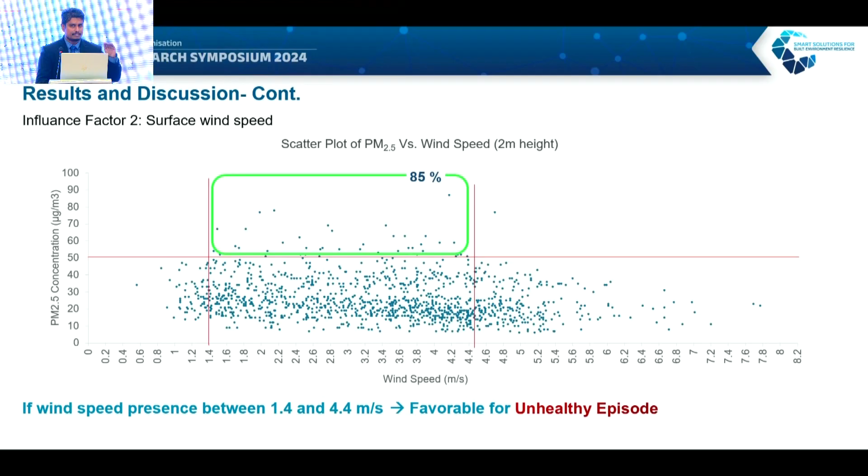If a temperature inversion is present, it lowers the mixing height, which leads to an unhealthy episode. That is the case. These are the results plotted between PM 2.5 concentration and wind speed. You can see in this graph, almost 85% of the episodes are recorded within 4.4 meters per second. Here you can see the 50 threshold value. As I mentioned earlier, this is the threshold. We are looking beyond that.

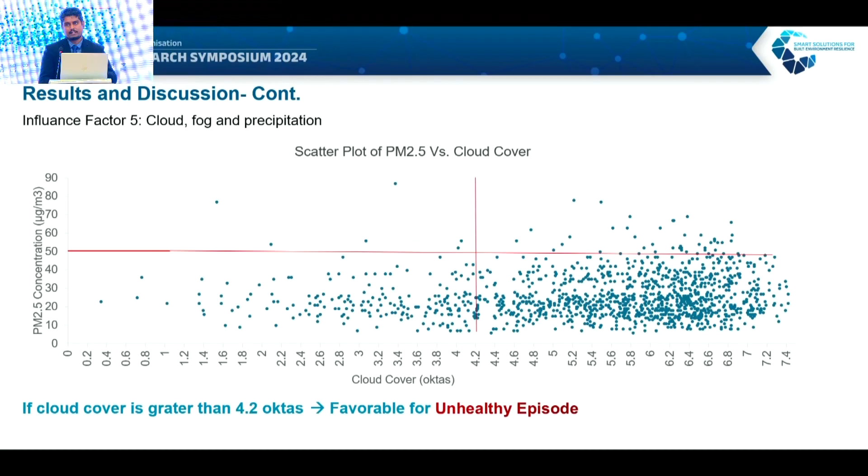Influence factor 4, ambient temperature: almost 98% of data points are observed beyond 27.5 centigrade. That means it's favorable for the unhealthy episode. Similarly, cloud cover, if it is beyond 4.2 oktas, it's favorable for the unhealthy episode. This one is the most critical thing.

This is the transboundary incoming and also local carryovers. In this influence factor calculation, we use the Hybrid Single-Particle Lagrangian Integrated Trajectory model. This model has the ability to identify where the major sources are, how they are transported to our desired location, and how PM 2.5 can vary along these lines.

If these parameters I mentioned one by one earlier exceed the limit or threshold values, it is verified that there is a significant probability that an episode will occur. Here, we clearly mentioned our episode is greater than 50 micrograms per cubic meter. By using these parameters, we can confirm, or rather we can say with a higher probability, that this kind of event can happen in future.

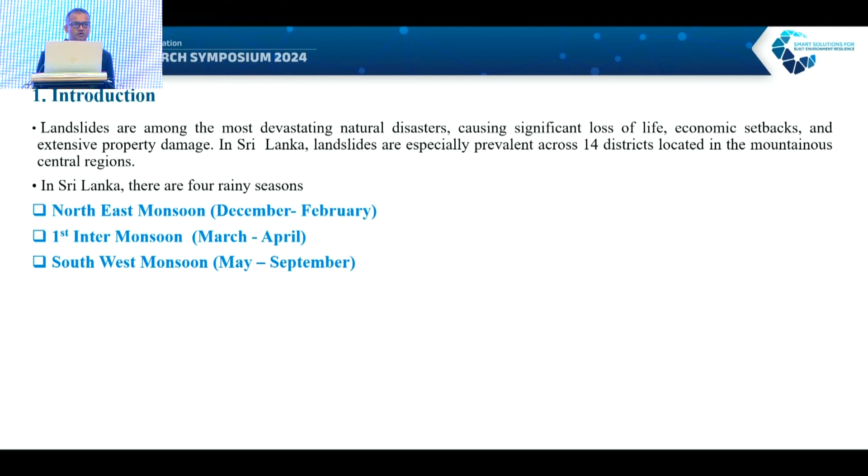In Sri Lanka, the National Building Research Organization has identified 14 landslide districts. The primary trigger for landslides is rainfall. Sri Lanka experiences two main monsoons and two intermonsoon periods. Northeast monsoon, December to February. First intermonsoon, March to April. Southwest monsoon, May to September. Second intermonsoon, October to November.

These are the empirical threshold values. As the designated authority, the National Building Research Organization issues landslide early warning alerts based on real-time cumulative rainfall for 14 landslide-prone districts. The warning thresholds have been determined using a limited number of recorded landslide incidents and the associated cumulative rainfall analyzed by experts in NBRO. However, these generalized threshold values applied to entire districts do not account for site-specific variations.

These are the warning levels. Level 1, watch: threshold limit is 75 millimeters per day, color code is yellow. Level 2, alert: threshold limit is 100 millimeters per day, color code is amber. Level 3, evacuation: threshold limit is 150 millimeters per day or 75 millimeters per hour, color code is red.

This is our research problem. The current landslide early warning system in Sri Lanka is based on the generalized 24-hour daily cumulative rainfall amount, with no consideration of long-term seasonal impact, which is needed to effectively address landslide events. Hence, the study focuses on seasonal influence considering the four monsoons, which would help to effectively address landslide events. Then we move on to the objectives.

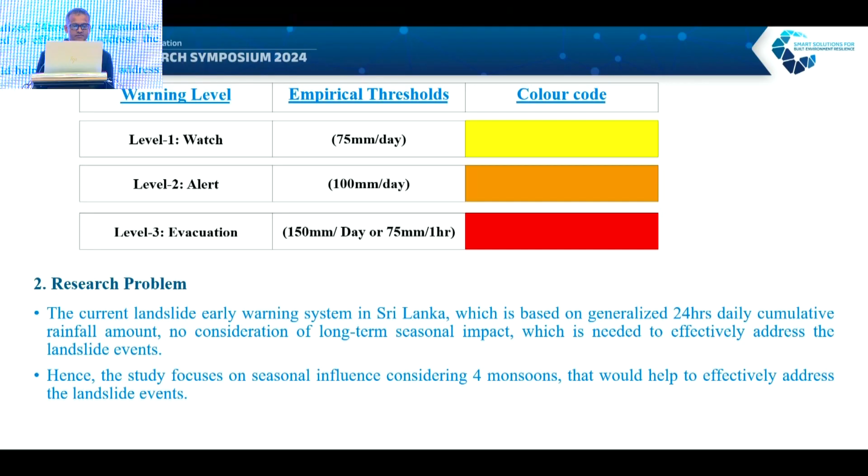The primary objective is to enhance the accuracy of rainfall thresholds for issuing landslide early warnings in Sri Lanka. To achieve this objective, there are four major tasks. Task 1 is analyze historical warning and rainfall data. Task 2 is reconstruct critical rainfall events and trigger conditions. Task 3 is evaluate current thresholds against reconstructed data. And the final one is determine optimal timing for warning issuance.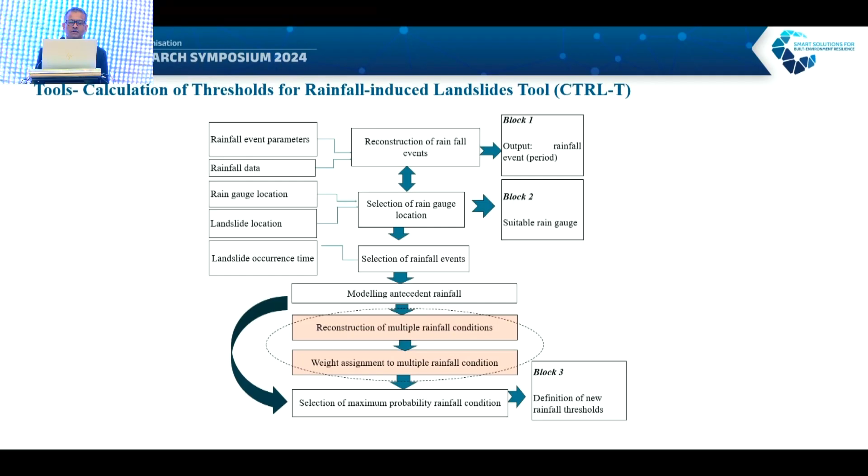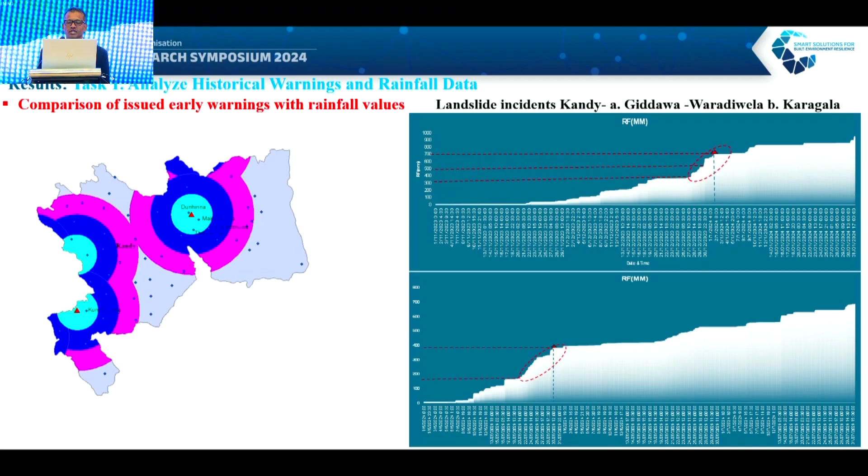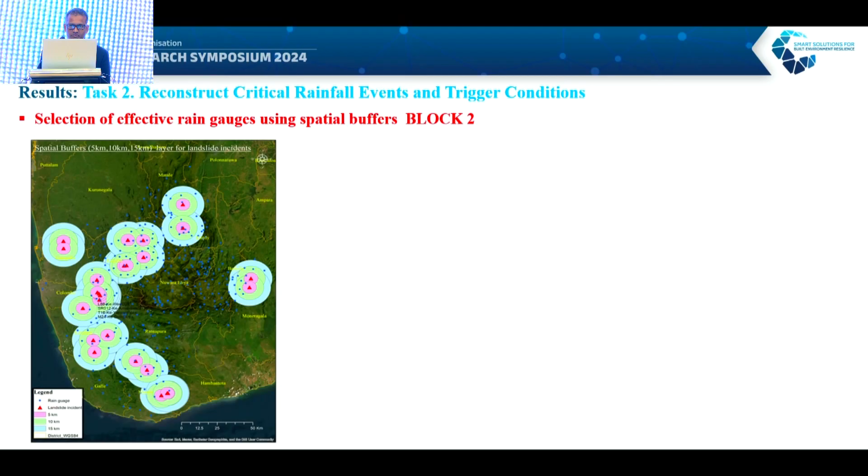Our existing warning system has watch, alert and evacuation. Limit is 75, 100 and 150. The reconstructed threshold values, there are two types, alert and evacuation. Values are landslide for 850 millimeter, cutting failures are 650. And in the evacuation, landslide is 1000 millimeter and the cutting failure is 750.

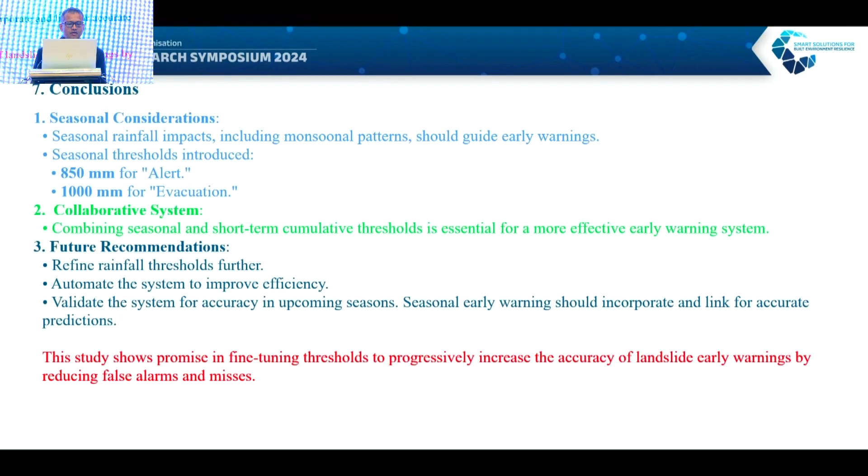This is the conclusion. Seasonal consideration. Seasonal rainfall impacts, including monsoonal pattern, should guide early warnings. Seasonal threshold introduce 850 for alerts, 1000 millimeter for evacuation. The collaborative system combining seasonal and short-term cumulative thresholds is essential for a more effective early warning system. These are the future recommendations. And finally, this study shows promise in fine-tuning thresholds to progressively increase the accuracy of landslide early warnings by reducing false alarms and misses. These are the references.

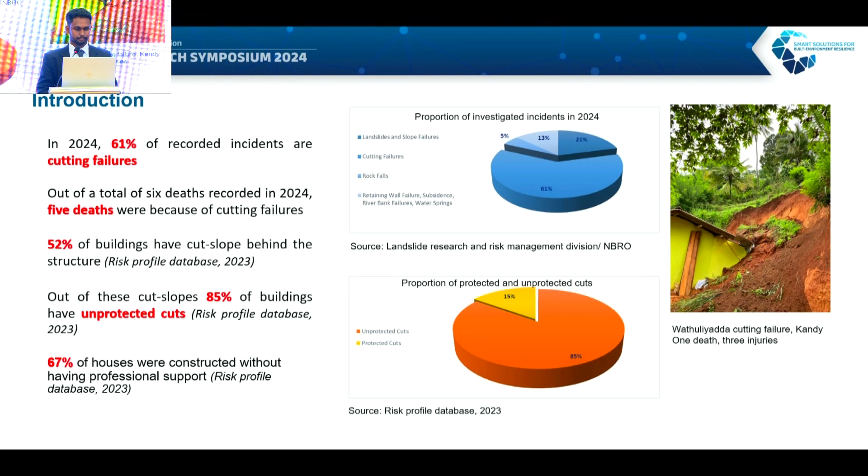Currently, we identify cutting failures with direct field investigations, but the issue is they are time consuming and resource consuming. We can also do spatial assessments to identify cut slopes, but they face challenges because of the lack of spatial data resolution. With haphazard constructions and loopholes in planning applications, we can observe that the number of cut slopes is increasing day by day. Therefore, there is a requirement for an iterative cut slope detection methodology in landslide-prone districts, an automated process to extract cut slopes to identify possible cutting failure locations.

So, we did a literature survey and identified several methods to investigate cut slopes. Most of them rely on manual methods, which can be prone to human error and are time consuming and resource consuming. But with the enhancement of remote sensing applications and spatial data resolution, we could observe that basic machine learning models are used to detect cut slopes using LiDAR digital terrain models.

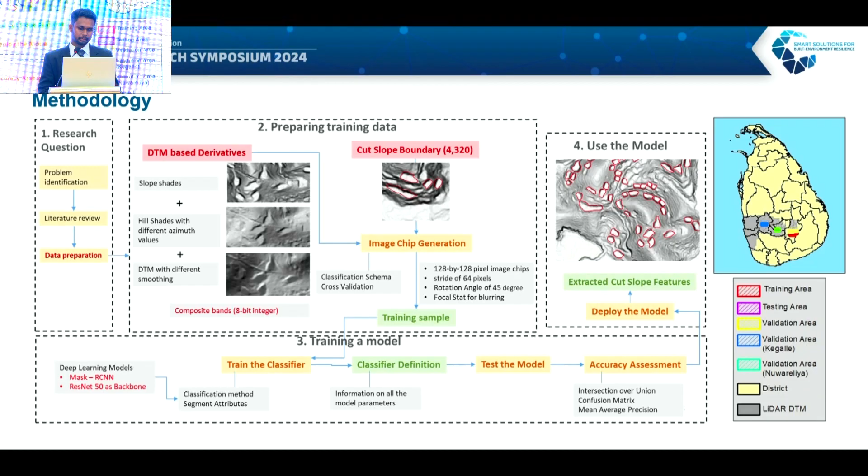For the research question, we identified the research problem and conducted a literature survey. For training data preparation, we developed training chips around over 4,000 cut slopes in Nuwara and Badulla districts. After that we trained the model, and for applications we conducted pilot studies in Kegalle, Nuwara and Badulla districts.

Here we can observe the training sample sites. The training data sets were developed in the Badulla area, the model was tested in the Badulla area, and validation was conducted in Kegalle, Nuwara and Badulla districts.

When we move into the Mask RCNN architecture, first there is a backbone model. In this model, ResNet 50 works as the backbone, then it goes to the region proposal network where we can identify and detect objects, and then we move into the region of interest where we fine-tune the model.

Basically it compares the training data set and the model prediction, and based on that it fine-tunes the model. The next one is fully convolutional nets, where it gives coordinates to the locations.

Every model needs a training process. The model was trained using these parameters: number of epochs around 20, batch size is 8, chip size is 128, and these were taken from the literature.

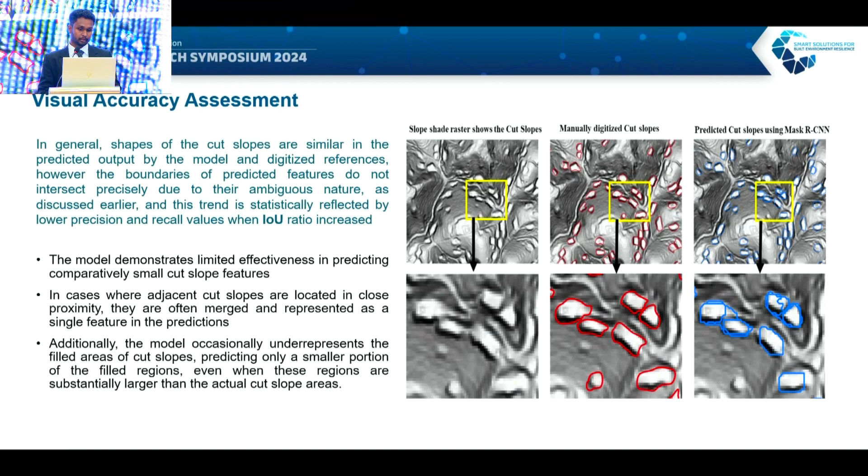We could observe that the model demonstrated limited effectiveness in predicting comparatively small cut slopes, and also it's unable to identify cut slopes when most of the cut slopes are located more closely together.

In the statistical accuracy assessment, we considered the true positive and true negative values of the model, and when the intersect over union is around 60%, the model's precision is around 81%. This highlights that this model can be used to identify and extract cut slopes using LiDAR digital terrain models.

Then we did the pilot studies in Badulla, Nuwara and Kegalle. In Badulla, we ran the model for a 20 square kilometer area and identified around 1,347 cut slope locations. In Nuwara we identified around 1,418 locations, and in Kegalle we identified around 1,124 locations.

In the discussion part, the Mask RCNN model shows over 80% accuracy, and this model can be used to extract cut slopes easily within a few seconds.

It could be observed that lower precision and recall values occur when the intersect over union threshold is higher, showing that using this model we can't accurately identify the boundaries of the cut slopes. We could also observe that the model demonstrates consistent performance across different regional locations like Badulla, Kegalle and Nuwara.

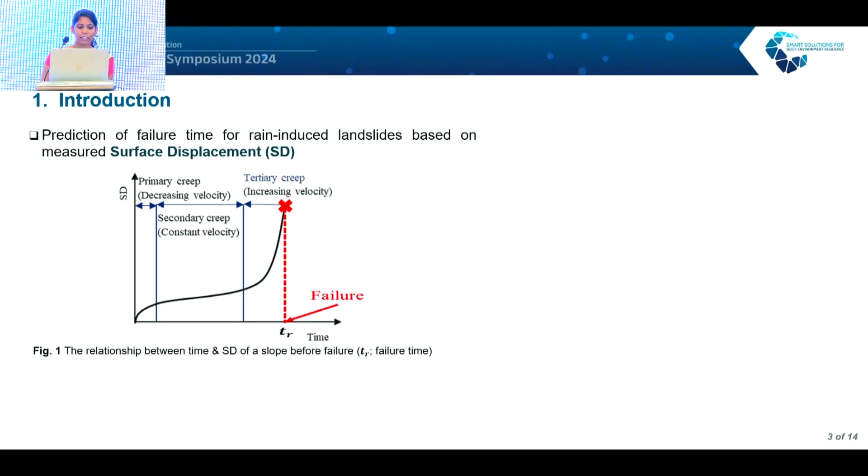Today's research study is mainly based on the prediction of failure time for rain-induced landslide by measured surface displacement data. Figure 1 shows the time variation of surface displacement. You can see 3 stages. At the end of the tertiary creep stage, failure occurs.

The research question is how to utilize extensometer data for issuing landslide early warning. Accordingly, the objectives are to study the relationship between velocity and acceleration of surface displacement for slow-moving type landslides in Sri Lanka, to evaluate the mitigation effectiveness of Udamadura landslide using a failure prediction method, and to make initial efforts toward proposing integration of this output into the landslide early warning process.

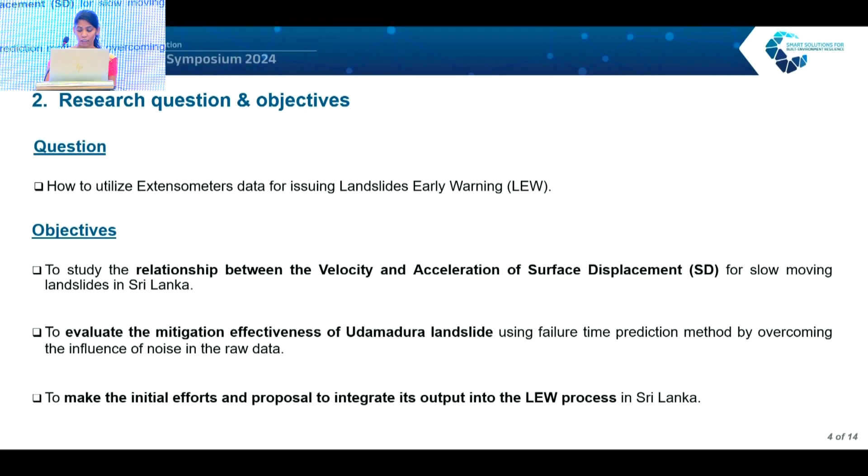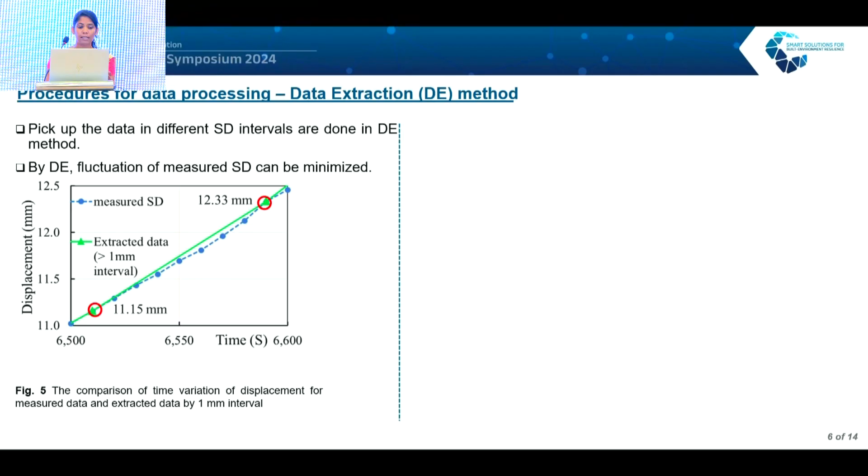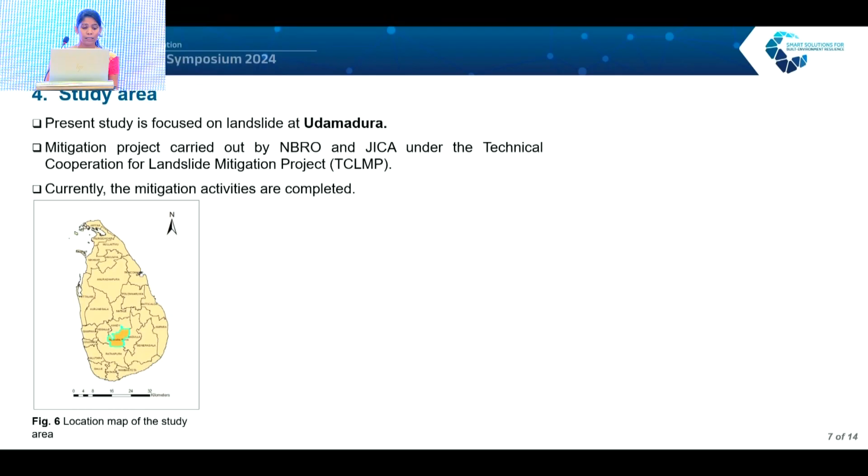Let's move to the results. First, measured data. We categorize these data into mainly 3 stages as pre-mitigation, during mitigation, and post-mitigation.

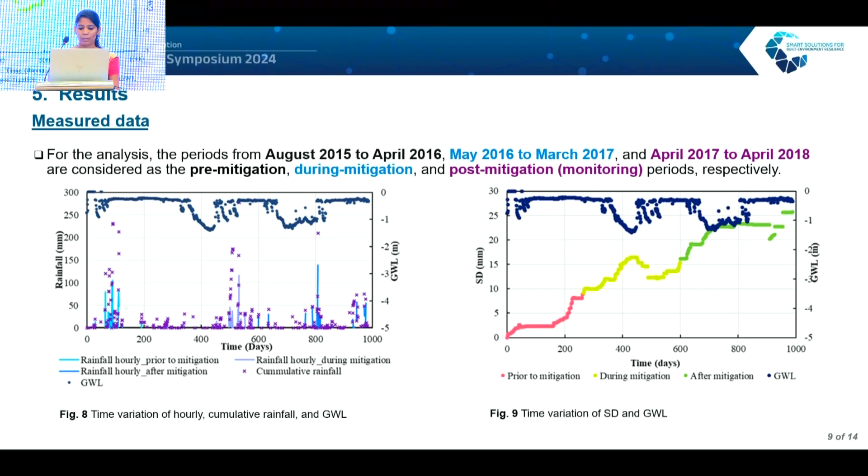In figure 8, you can see time variation of rainfall and variation of groundwater level data. Accordingly, I categorize into 3 stages. Figure 9 also shows the time variation of surface displacement data. As I explained, you can see the changes of surface displacement with the variation of groundwater level.

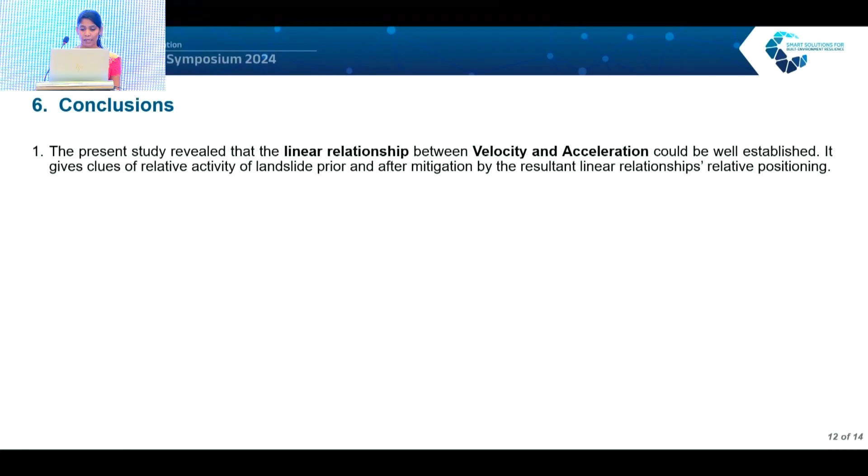These are the conclusions of my research study. The present study revealed that the linear relationship between velocity and acceleration could be well established. Second, the increase in trend of time remaining to failure in the stage after mitigation reveals that dewatering and surface drainage improvement creates significant effect over the unstable soil mass.

Third, the results of predicted failure time emphasize the necessity of issuing landslide early warning when any point of time remaining to failure is on the line of decreasing trend over time. Fourth, it is important to monitor movement and changes with sensitive real-time monitoring equipment to get better understanding, and also insufficient data causes poor accuracy of prediction.

These are the recommendations. First, obtaining accurate measured time series surface displacement data for several selected slow-moving landslides is important for future analysis, studies, and landslide early warning purposes to implement an on-time monitoring system. Second, there is a necessity of developing a site-specific relationship between rainfall intensities and surface displacement by back-analyzing with the available data to establish the concept. These are my references. Thank you.

So thank you. So these are the 4 presentations. We discussed how air and rainfall variations relate, then we discussed how we can identify the cut slope from the LiDAR, and now we discussed deformation. So if you have any questions from the presenters, you can ask now.